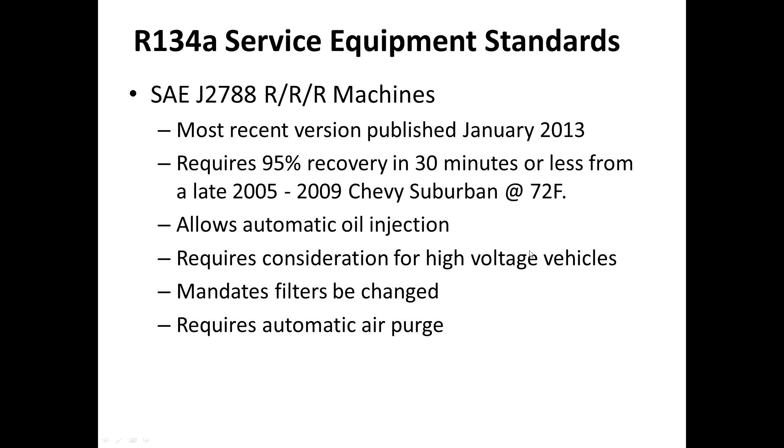Originally, there were some patents involved in that, where certain companies had patents on the process of automatically purging air. As we did 2788, those patents had to be released, what's called a FRAND, fair and reasonable agreement reached to be able to use the patents owned by someone else for the greater good. And so we now have automatic air purge as a requirement in 2788 machines.

So this is a list of SAE J2788 approved machines. And I think the important thing to note, and I think you'll see this at the very end, is this comes from a website called macdb.sae.org. The MAC database was created as part of another SAE standard, J2911, as a place where manufacturers of equipment who have gone to an approved testing lab that meets all the requirements that a testing lab should have, and have had their product tested and have had their product pass the test, they can then send their data to SAE along with a small check, and your product information will be listed on the SAE website.

And you might think, well, why would that be important to me? Well, it's important to you because if you see a machine that's listed as 2788 approved and it's not on this website, then that means that that company may have gone to a lab that's not certified. It may have just decided to put a label on it and never tested it.

Inevitably, it'll probably be a lower price machine, and you'll find even at places like SEMA and AAPEX, there are a ton of vendors, particularly from the Far East, that are offering machines for sale that do not meet the new standards, 2788 or 2843 or any other SAE standard. Yet they may advertise them like that.

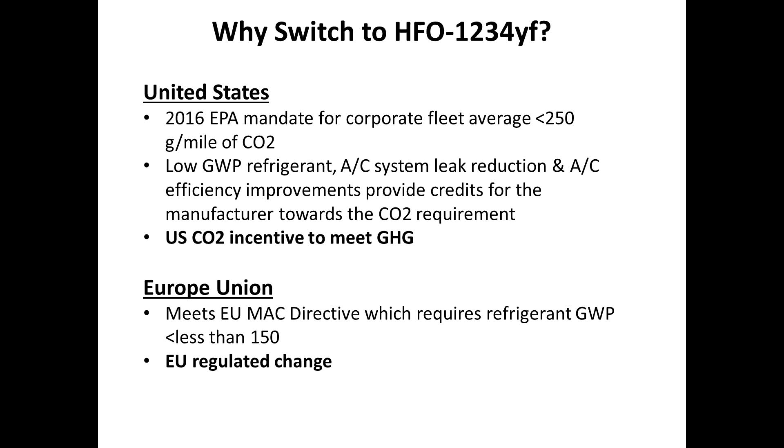So, of course, the U.S. realized it's a global market economy and decided this is the direction they were going to go and implement the same rule. So 134A at 1,300, 1234yf less than 1. Another consideration was 152A. 152A is commonly used in keyboard duster. The problem is it's pretty flammable. And there needed to be some real considerations on what to do with vehicles in order to mitigate that problem.

One of the suggestions from one of the engineers in one of our meetings was, well, we're just going to put some solenoids and some vents into the wheel wells so that if you had a front-end collision, you could vent the refrigerant into the wheel wells and you wouldn't have that flammability risk, until someone reminded them that in a collision like that, the guy or lady was probably hard on the brakes, and your brakes could be at 1,500 degrees Fahrenheit. You're about to spray a flammable liquid right onto these 1,500 degree Fahrenheit brakes, so that idea wasn't well accepted.

We also have an option of R-744, or carbon dioxide, that's similar or identical to what carbonates our beer today. That may show up in some vehicles. You may have read some articles that said the Germans are going CO2. Well, I can tell you the Germans would like to go CO2. CO2 has some good sides. It's considered environmentally friendly. Some bad sides.

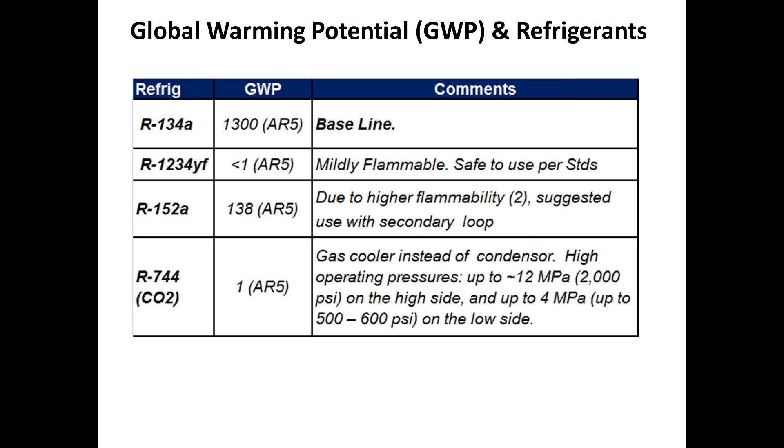I'm back. CO2 has a secondary problem where it's very high pressure, and that high pressure causes some service issues. And it also is not very efficient. So you need a lot of CO2 or a big system in order to cool. So they're going to try to put it in some bigger vehicles, some buses. Audi A8, I think they're looking at putting it in. Volkswagen Phaeton, big vehicles that can afford the weight, that can afford the size, and try to use that for their cooling. But we'll have to take a wait and see approach and see if they come up with some new technology to make that more efficient.

So we've already talked about this a little bit, but why was YF chosen? Well, among them was it's very similar to 134A. Performance is very similar. The operating characteristics are very similar. Its safety is very similar. Its low global warming potential. Its short atmospheric lifetime. The properties of YF are almost identical, which means servicing of a YF system is virtually identical to a 134A system.

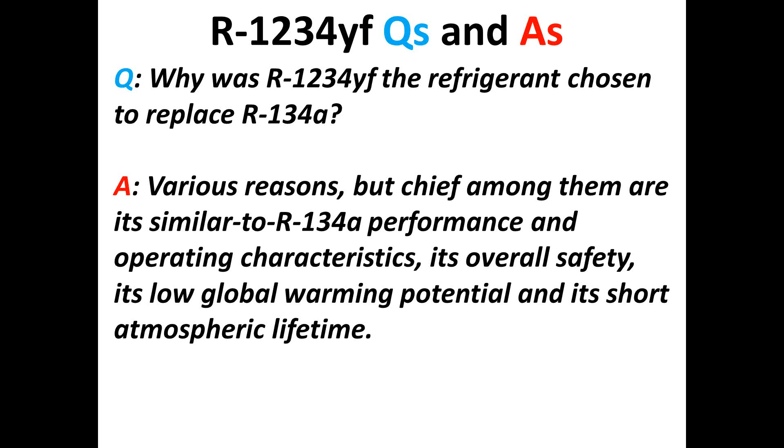If you take a look at the vapor pressure, 134A mirrors that of 1234yf. It's almost identical. It's off 3 degrees at 70 degrees Fahrenheit. I think it's about 71 psi, and 134A is going to be 74 psi. So they're almost on top of each other. The thermal stability under extreme use conditions in MAC systems is very, very good. It doesn't break down. It has a high capacity. And there were only minor design changes that were needed.

The one drawback is it's mildly flammable. And we'll talk a little bit about what mildly flammable means, but it's mildly flammable. And that's really in order to get that global warming potential down to less than 1. You have to have a fluid that disintegrates in the atmosphere very quickly, has a very short atmospheric lifetime, and 1234yf does just that.

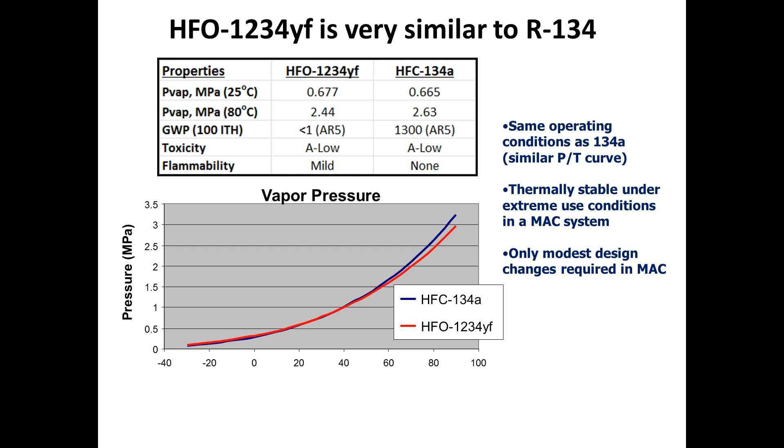So how flammable is it? Well, it's among the lowest flammable products under the hood, frankly about the lowest flammable product under the hood. If we take a look at this chart, you'll see that you have gasoline, diesel fuel, engine oil, transmission fluid, power steering fluid, and then 1234yf. And we could add in there, between power steering and YF, antifreeze, you could add windshield washer fluid. Those are all more flammable than 1234yf.

So there were some stories out there, some talk about Daimler and their rejection of 1234yf on the principle of flammability. And when you actually take a close look, their test was a simulation. The simulation was unrealistic, and if they had run that same simulation and instead of spraying 1234yf on the turbo exhaust, they'd sprayed gasoline on there using the exact same setup, redirecting from the fuel rail instead of from a refrigerant line, there would have been mass panic that all the vehicles we're driving around in could catch on fire, because, you know, look what can happen when you put gasoline on something that's 700 degrees C of temperature.

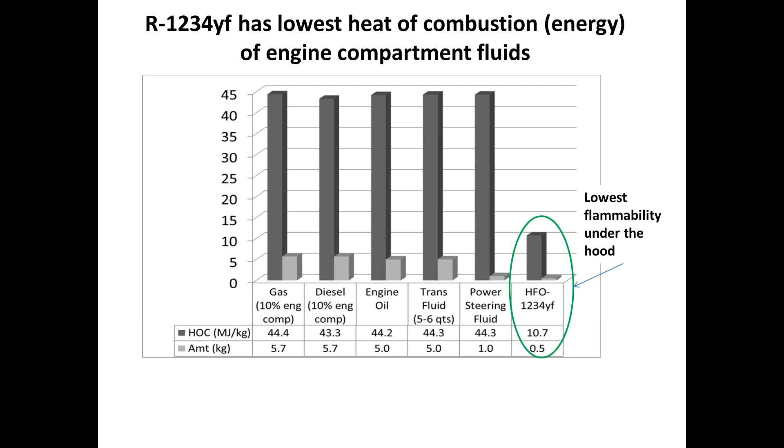So should you be concerned about this? Well, as always, everything that service technicians deal with in the shop, you have to be cognizant of toxicity, flammability, other dangers that are associated with them, things like wearing glasses, wearing gloves. But it's very, very hard to ignite 1234yf. And if you did ignite it, the flame path is very, very short, and it does not burn very hot. So it's very unlikely that it's ever going to catch on fire in the work that you're doing.

And there are things that you deal with. Every time you fill a car with oil, you're dealing with a more flammable substance than 1234yf. The difference is it's under pressure. Of course, pressure makes it more hazardous, but no more hazardous than 134A from that perspective.

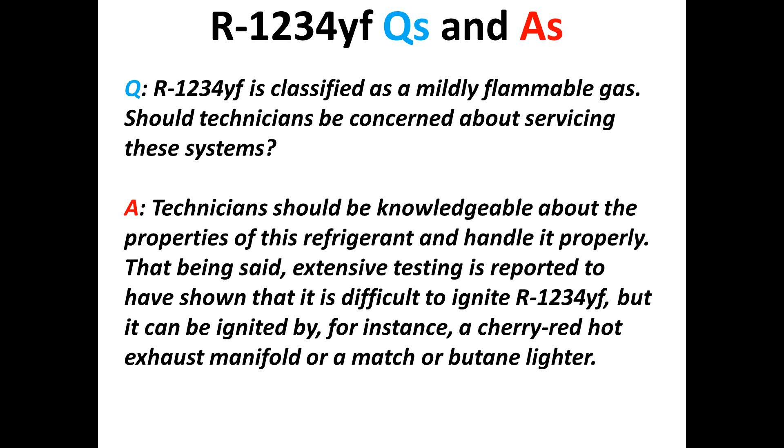There are a couple of minor differences in systems between 1234yf and 134A. The evaporators in a 1234yf system have to meet SAE J2842, and we also have some differences in the service ports. SAE J2842 was created as an evaporator standard because they wanted to make sure that we had a slightly beefier evaporator, because we wanted to reduce the risk of having a leak into the passenger compartment of a mildly flammable fluid. So we created that.

We'll find 2842 evaporators in some 134A vehicles, very, very recent 134A vehicles, as they begin to think about making them into 1234yf cars at some point in the not too distant future. But older vehicles won't have an evaporator that meets 2842. Service ports are different, but almost the same. They look like 134A ports, they're just a slightly different size.

And typical YF systems will contain something we mentioned earlier, an internal heat exchanger, or an IHX. No moving parts. It's part of the low side plumbing assembly in the system, and it improves cooling efficiency. It helps change the state of the refrigerant from liquid to vapor, or from vapor to liquid, to give the refrigerant kind of a kickstart in being able to absorb more heat.

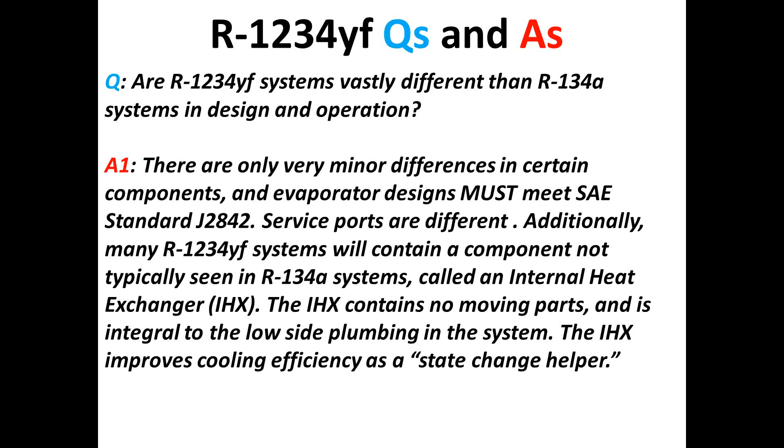This is what an IHX looks like. You've got low temperature, low pressure gas that goes into the inside, and then you have high temperature liquid refrigerant on the outside, and it goes in as one, comes out as the other, and it's really just a dual path, just two paths. And you're going to find that located in the low side line of the system. Looks like a small bulge. If you haven't seen one, it's just kind of like a small bulge, almost like not

a TXV, Dave, help me. Whatever that other thing is that I can't remember.

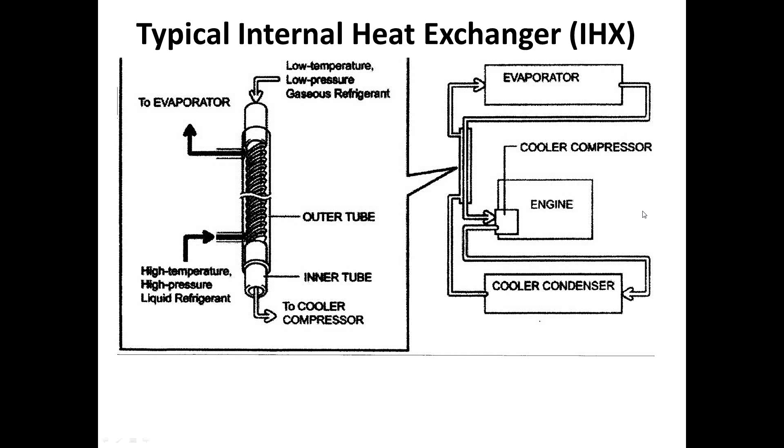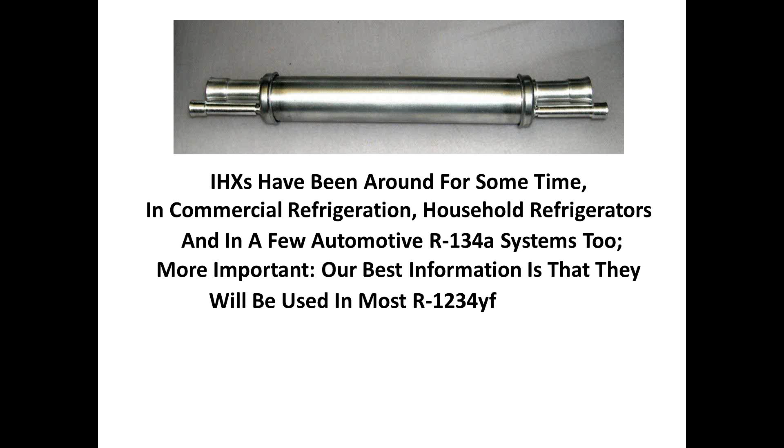So it's located in that line, and it's a non-moving device, non-mechanical, shouldn't ever cause any problems. This is what one looks like. Again, you see two paths, one that goes inside, one that goes outside. They've been using them in commercial refrigeration for quite a while, household refrigerators, and they will be in almost all of the 1234yf systems. And the word I was looking for was orifice tube. Looks like kind of the bulge you'd have from an orifice tube.

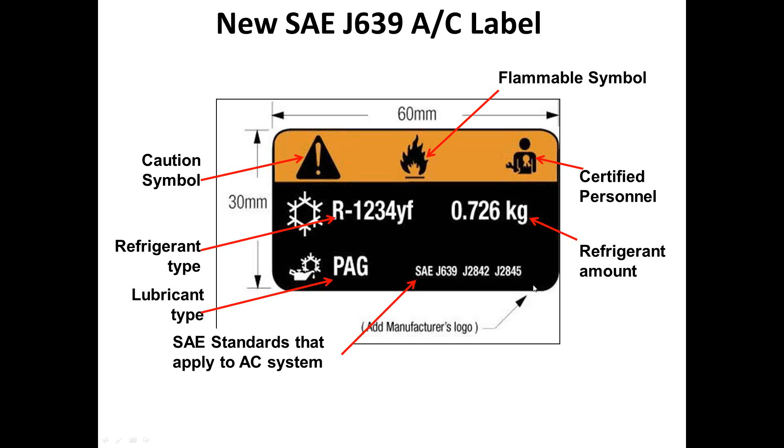Among the other differences you'll notice is under the hood of the car, you're going to have a label. That label is the new J639 label, also references 2842, indicating that it has a 2842 compliant evaporator, and 2845, which is that standard that we used to create the new 609 certification testing. Caution symbol, a flammable symbol, a certified personnel symbol, the amount of refrigerant, little snowflake indicating that you can get burned because it can get really cold, 1234yf, type of oil, and potentially a logo for a manufacturer. Not all manufacturers will use this, but the flammable symbol is really the new thing that's there.

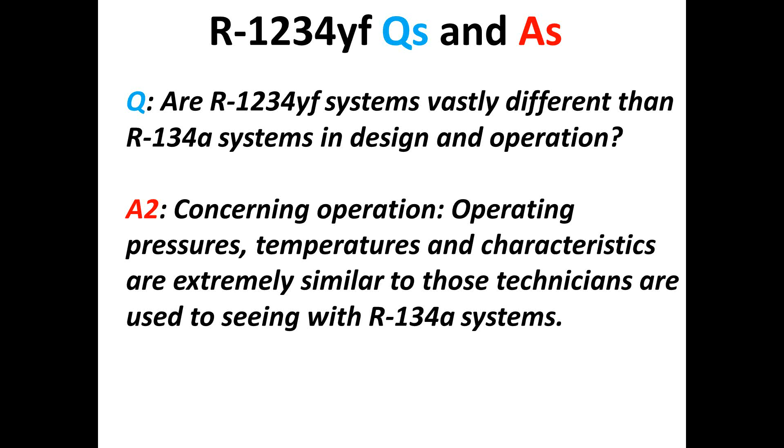How about operation? In operation, 1234yf systems are almost identical to 134A. Again, the pressures, temperatures, characteristics are extremely similar to those that you're used to seeing with a 134A system. So if you know how to diagnose a problem with a 134A system, diagnosing a problem with a 1234yf system will be cake. It's almost the same. Yep, you might have an internal heat exchanger now. But other than that, you're not dealing with secondary loop systems. You're dealing with a direct expansion system that works in a very, very similar way to a 134A.

Again, here's the PT curves with 134A and 1234yf, and you can see they are virtually identical. Again, 3 degree difference, 3 degree Fahrenheit, 3 PSI difference at 70 degrees Fahrenheit.

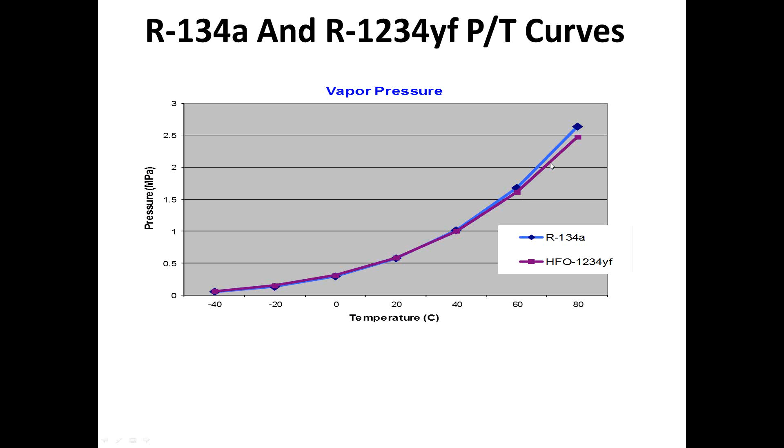Will you need different service techniques and procedures, or will those service and repair procedures be the same as working on a 134 or R-12? Well, we just mentioned that the procedures are going to be the same, almost identical. No steep learning curve at all for technicians that are already qualified. One big difference is if you got your 609 card or certificate way back when, in 1997, and you go take that 609 test now, you better study, because we know you've been working on cars for a long time, but the test is a lot different. Back in the old test, I could take a 10-year-old, give them a credit card and an open book, and they should be able to pass the test. Well, that's not the case now. You need to know a little bit more than you did before, and in reality, that's a good thing.

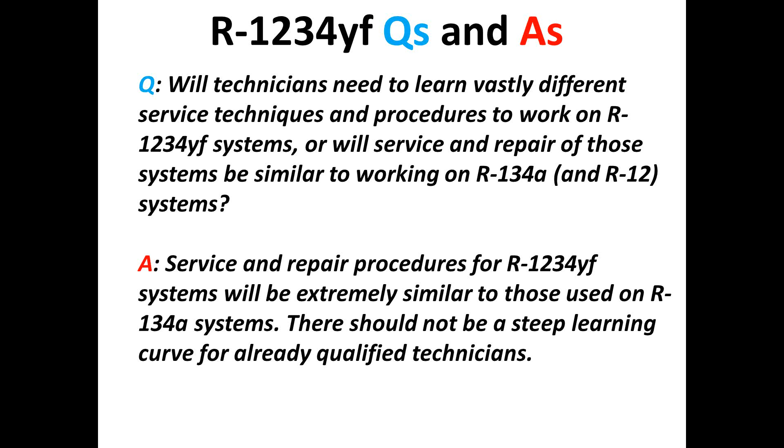How about certification? Well, right now, there is no certification required to purchase 1234yf. Pretty disappointing from our perspective. We didn't think that was a good idea, but their reasoning for this is, look, we're the EPA, the Environmental Protection Agency. If you say that 1234yf is as good for the environment as you claim it is, then why should we restrict the sale? We didn't restrict the sale of 134A. We're not going to restrict the sale of 1234yf. So eventually, you may expect to see small 1-pound cans of 1234yf on the store shelves, just like 134A.

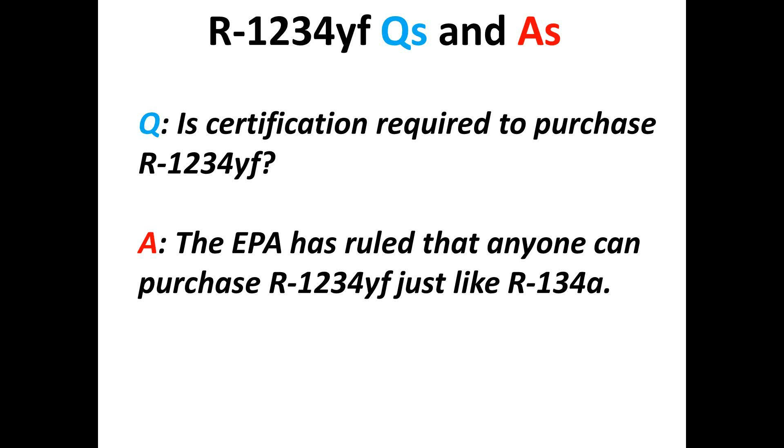Currently, if you service vehicles for compensation, you have to be certified to 609. Currently, there is no new certification for 1234yf or recertification. However, there is a proposal that's been made that says, yes, people should have to recertify because there's been a lot of changes. You recertify to the new 609, which would talk about YF and talk about CO2. There are enough differences that have taken place since 1992 when that first Section 609 came out that it may be a really good idea for older technicians, who we know have been working on cars for a long time, to recertify. So there is a proposal there. Currently, everyone is grandfathered. We'll see if that changes or not. Maybe way down the road if it does.

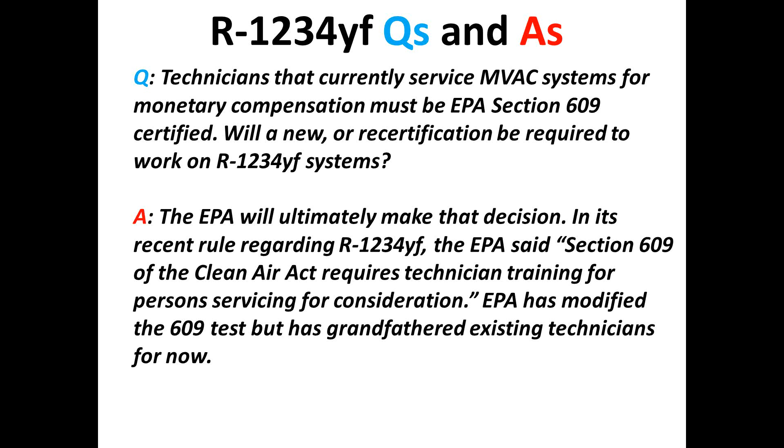But currently, you're getting about as much information today in this webinar compared to what you would see in the new 609 test that you guys should be able to pass the test just from coming to the webinar today. Can't guarantee that. Probably have to go to another one. But there's enough differences, and you're seeing a lot of them now.

So what do we need to do to work with 1234yf? Well, of course, we have new service equipment, new service labels on the cars. We showed you that. 2842 evaporators, new fittings. We talked about that. Recycling machines, cylinders, new oils and dyes, new packaging of refrigerant, and, of course, new ASE technician training 609 class.

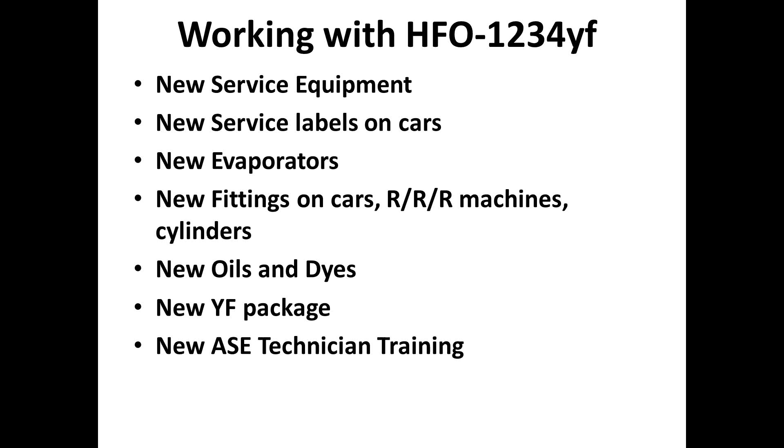The minimum equipment required to properly service 1234yf vehicles includes a recovery recycling machine certified to the appropriate SAE J2843 standard. And we say that because that standard has evolved a little bit, and there's a couple of different versions now. But an SAE J2843 approved machine is needed.

It now mandates that you must test the refrigerant before you recover it. The machine will automatically ask you to connect a refrigerant analyzer to a USB port on the machine, or will use an internal refrigerant analyzer to test the refrigerant before it will be allowed to recover the refrigerant. It locks you out.

It also requires the use of a 2913 leak detector. 2913 is the standard for leak detectors approved for use with 1234yf. Very similar to 2791 leak detectors, the 3 different leak rates; they really just took the standard, substituted 1234yf for 134A, and they went and tested them, made some software changes, and created 2913 leak detectors.

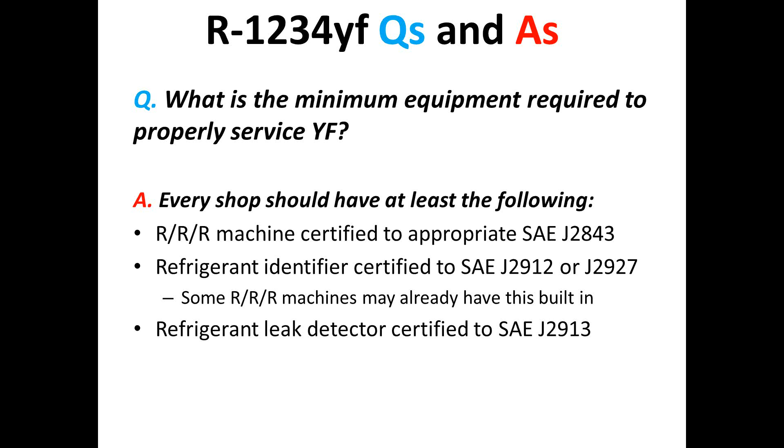One of the parts of the process of servicing the vehicle is the machine will ask you to place a certified leak detector on the passenger floor of the vehicle, and check to make sure that under a pressure test the vehicle is not leaking refrigerant and that the leak detector is not alarming. So that's why they consider that 2913 leak detector to be a required tool.

There's a new standard, SAE J3030, which was just approved in July of this year, and 3030 is a dual machine. It's a machine that meets both SAE J2843 for servicing 1234yf vehicles, as well as SAE J2788 for servicing 134A vehicles. Those machines, both the 2843 and the 3030, may have an integrated refrigerant analyzer, or they can use an external analyzer through a USB port.

They must meet the requirements for a mildly flammable refrigerant, or what's called an A2L refrigerant, including things like non-arcing, non-sparking switches, cabinet ventilation, where there's a fan inside there that's circulating the air. A certain number of air exchanges per hour are required because they want to make sure there's no buildup of refrigerant inside that cabinet. There's a two-step process now for checking for leaks, and this has been a bit of contention for some machine manufacturers.

The first part is a vacuum decay test, where they pull a vacuum, and this, of course, is after you've recovered the refrigerant. If it identifies that there's a leak that is too large, that it can't pass the vacuum decay test, the machine stops. The problem with that, in the case of some machines, is if the machine stops, it never lets you get to the pressure check. And if you can't get to the pressure check, you can't get refrigerant back in the system. And if I can't get refrigerant back into the system, I can't use an electronic leak detector to find the leak.

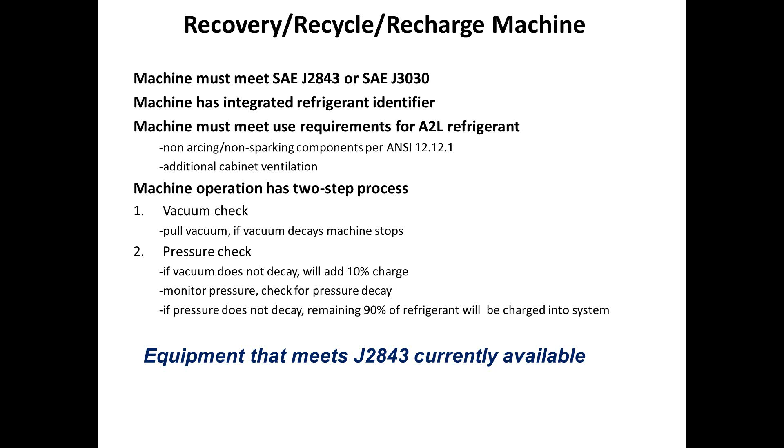There is a slight pressure change. If you were to mix 1234yf with 134A, you would get about an 8 psi increase on the high side from a pressure standpoint. It does affect the pressure-temperature relationship from a servicing standpoint, but it does not pose a risk to the system.

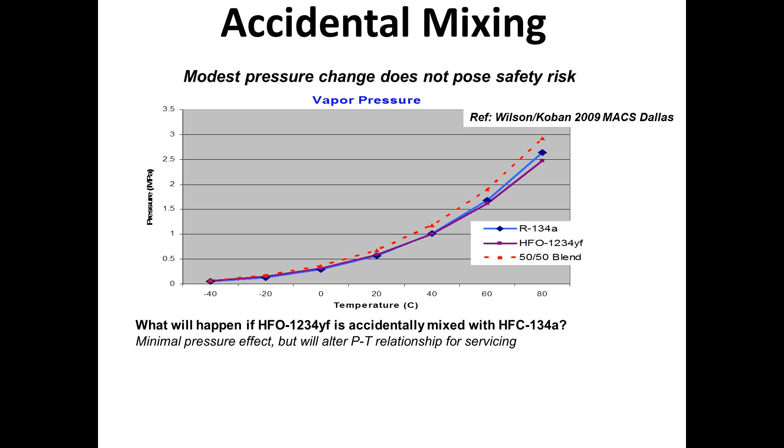With other refrigerants, if you mixed 12 and 134A, you created an azeotrope, and an azeotrope had a significantly increased pressure, and that could cause some hazard to the technician and/or the equipment they were working on. But you don't quite face that with 134A accidentally mixing with 1234yf.

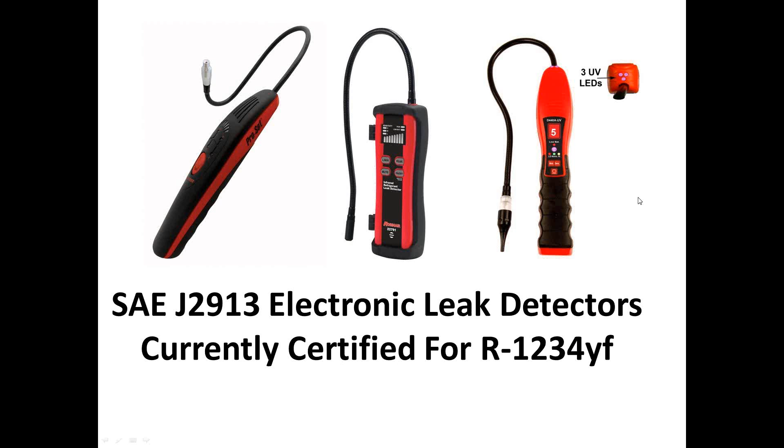So what's it all cost? That's what everybody wants to know. Well, prices will be a little higher than those of 134A tools. You can be assured of that. Early adopters pay early adopter prices. So if you want to be the first guy on the block with that brand new computer that just came out yesterday, you're likely to pay full price for it.

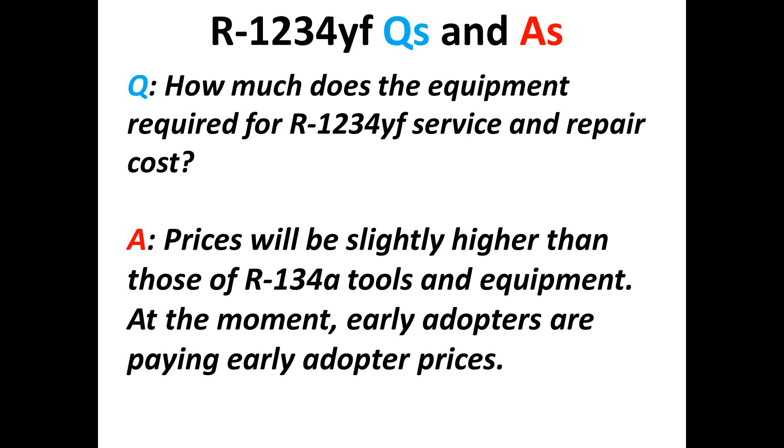As more machines have come out, prices have started to come down. And we expect that to continue. We do not expect them to fall below the current prices for 134A machines, but we expect them to get relatively close. And that goes for leak detectors, refrigerant analyzers, AC service machines, and all those tools.

So again, we'll back up to the evaporators. They must meet 2842. If you need to replace an evaporator, you cannot use a rebuilt or a 134A evaporator. So even if you're working on a car where the only change was they put new refrigerant in this version compared to last year's version, you can't use last year's version evaporator in this year's version car because it likely won't meet 2842. It must meet 2842.

One of the main reasons we won't see reverse retrofits is that you're not going to use 134A in a 1234yf car. So what's that mean concerning 134A? It means 134A is going to be available for a long time to service 134A cars. If you're not aware, while there's not a whole lot of R12 cars left on the road, there is plenty of R12 available. It's readily available.

If you have a 609 certification, there's a whole bunch of places, particularly reclaimers, that are happy to sell you a 30-pound cylinder of R12 if you want to use that on a classic car project or something that would just be better with R12. And that's been gone for over 20 years now. So we can expect that 20 years from now, you'll still be able to buy 134A to service 134A cars.

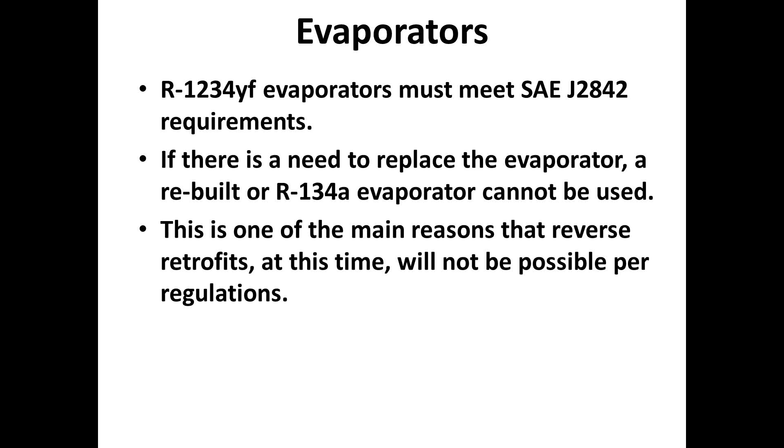One of the questions that often comes up is about dyes and oils. Well, oils for 1234yf cars are different than the oils for 134A cars. Not significantly different, but they have a different additive package. Dyes also are usually propelled by oils. Essentially, a dye is nothing more than the coloring of oil, and then you put that oil dye into a system, and it gives you that fluorescent effect throughout the system.

So universal dyes and oils are not a great thing to look at right at the moment because we don't have enough experience with universal dyes to know that the compatibility with 1234yf systems is going to be good in a couple of years. There are some specific dyes and specific oils that have been released for 1234yf, and we recommend that you stick with things that are designed for YF and not a universal product.

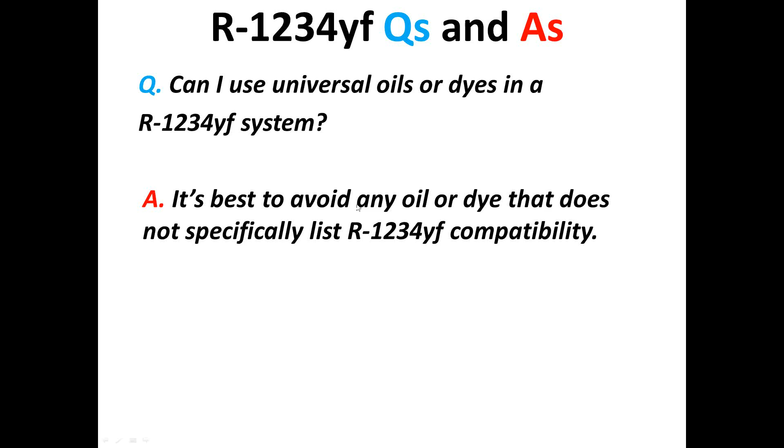In general, YF can be used with the same type of oil as 134A, meaning a PAG or a POE, and the same type of dyes, but not the same dye. The additives in the oils or dyes that are designed to work with 134A are not always well suited for 1234yf. In particular, they found that the additive package that was put into 134A PAG oil was not completely compatible with 1234yf as a refrigerant, and that oil might start to prematurely break down if you were to use that.

So you want to stick with an ND12 oil for 1234yf if it's a PAG, or an ND11 if it's a POE, as opposed to an ND8 for 134A. A lot of the manufacturers are trying now to go to a single oil, meaning they're not going to have a 46, a 100, and 150 weight oil. They're trying to go across their line with a single weight oil so that you don't have to stock too many different varieties. But you want to make sure you're using an ND12 or an ND11 for 1234yf systems.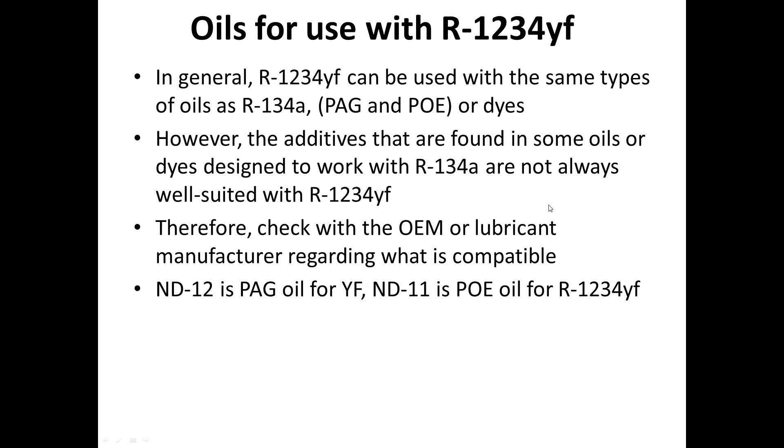The other reason is the stuff's pretty expensive. And if I'm going to leak out of a cylinder, I want to only leak out 10 pounds, not 30 pounds. And if I'm going to have one walk away into somebody's back pocket, I only want to have a 10-pounder walk away, not a 30-pounder, because the stuff is not cheap.

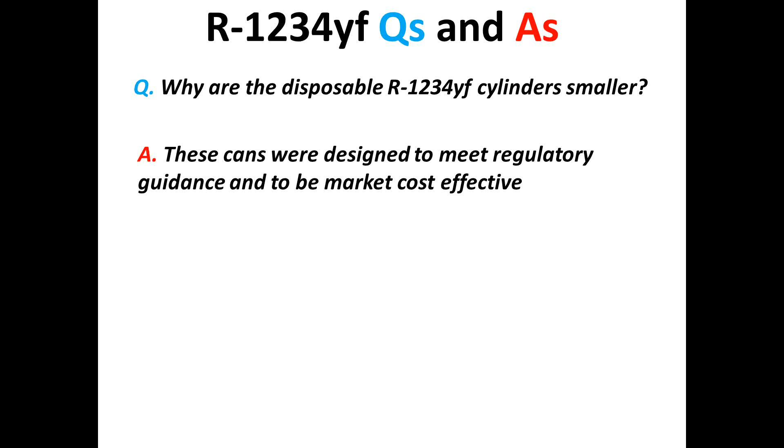This is what a cylinder would look like. It actually does look like this. This is put in there just to highlight the fact that it is a white cylinder with a red band on it at the top. It's 10 pounds, 4.5 kilograms. It has a pressure relief valve instead of a rupture disc, which is a good thing. It means if it gets too hot, pressure gets too high, it relieves pressure until the pressure goes down, as opposed to blowing out all the refrigerant.

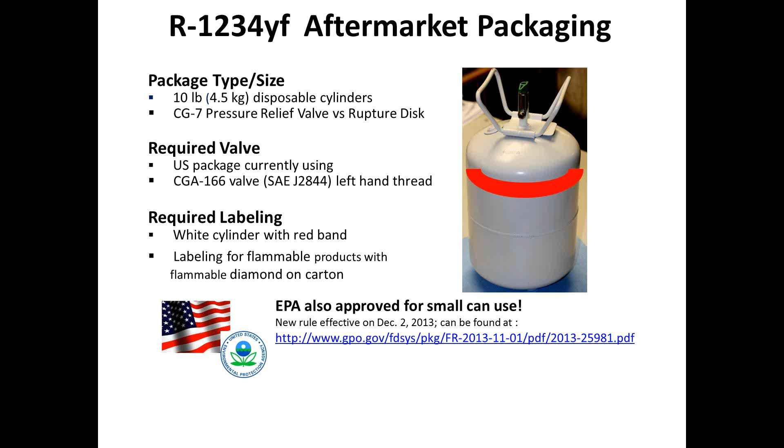Packaging uses a CGA 166 valve. Essentially, it's pretty simple. It's a left-hand Acme thread. So it's the same thread as on a 134A tank, except it's a left-hand thread instead of a right-hand thread. White cylinder with a red band, labeling for flammable product, including the diamond on the carton. And EPA has approved 1234yf for use in small cans. You'll also see the new internal pressure relief device without the rupture disc. Allows you to blow off refrigerant and then reseal.

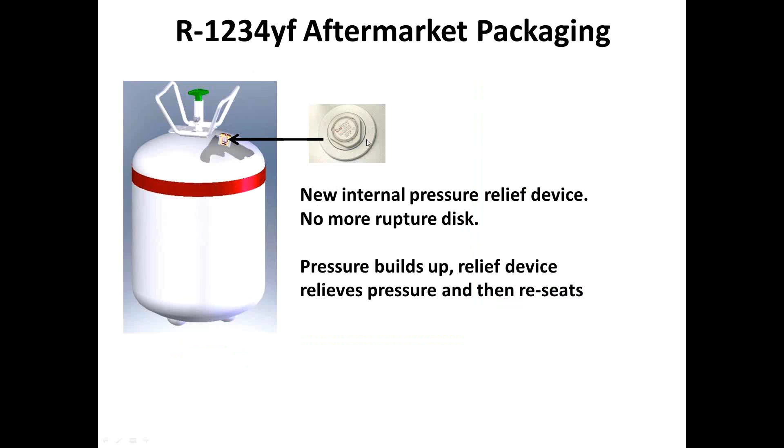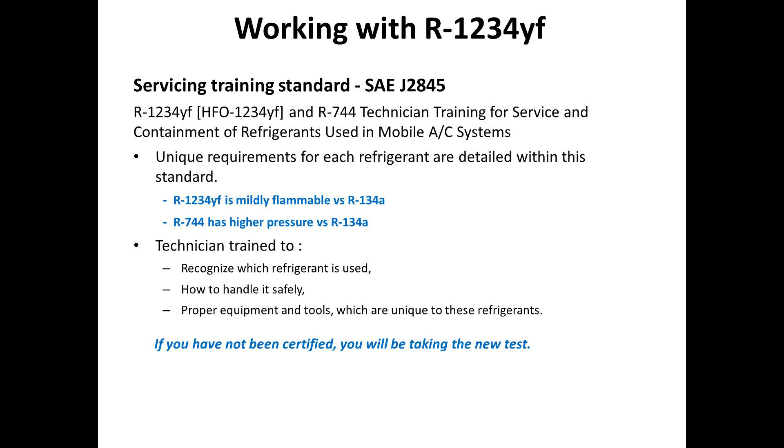Service training standards, SAE J2845, that of course is the basis for 609. Gives some additional training on 1234yf and CO2 or R-744 for containment of refrigerants used in motor vehicle systems. Talks about the unique requirements for each refrigerant, the mild flammability of YF versus 134A, or the higher pressure of CO2 versus 134A. And technicians now get trained to recognize the type of refrigerant being used, how it needs to be handled, and the proper tools and equipment that are unique to these new refrigerants and any other new refrigerant that may eventually crop up.

So from a service standpoint, you want to understand the unique differences between YF and 134A, in particular the slight flammability difference, identification of the different fittings and the labels for each refrigerant, along with what kind of tank you're working with. How to use refrigerant identifiers, you're going to need to know how to do that, whether it comes from Neutronics or from somebody else. It's mandatory on the 2843 or 3030 machines, so servicing YF systems requires that. You need to know how to use electronic leak detectors and/or fluorescent dyes. Each has a place in the industry.

Understand good servicing practice, including proper recovery, recycling, and recharge, as well as the safety and environmental aspects, vehicle recommendations from the manufacturer that are designed really to promote safety for the technician, minimize the impact to the environment, and provide guidance on the appropriate recovery, recycling, and charging equipment.

It's important to note that compared to old 134A systems, new 134A systems and subsequently 1234yf systems use significantly less refrigerant than we used to. And that means that refrigerant charge is critical. Another aspect of 2788 machines and 2843 machines is their charge accuracy and their scale accuracy for recovery to make sure you get the correct charge. Because overcharging a vehicle will make it inefficient and make that system not work well. And we need to be much more precise than we used to be as these systems have gotten smaller.

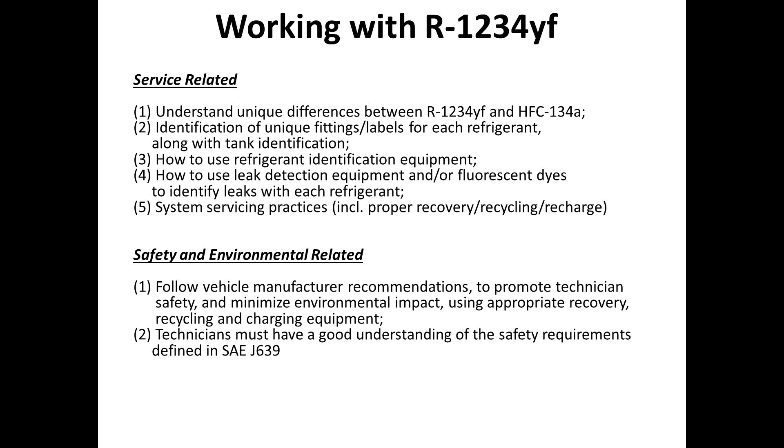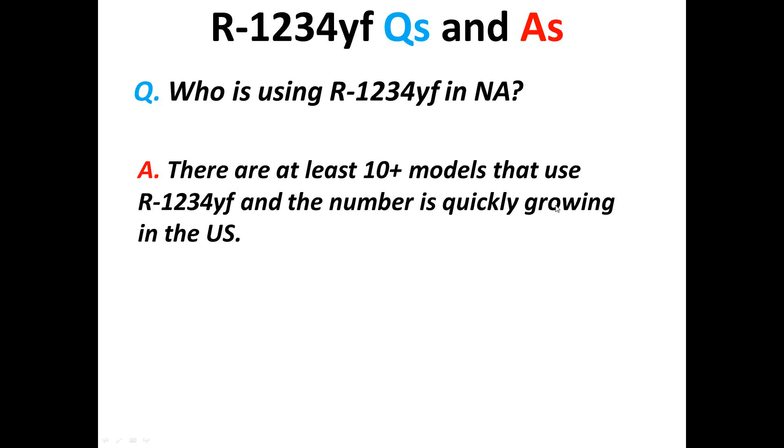So who's using 1234yf right now? Well, 1234yf is being used in over 10 models, and that number is continuing to grow.

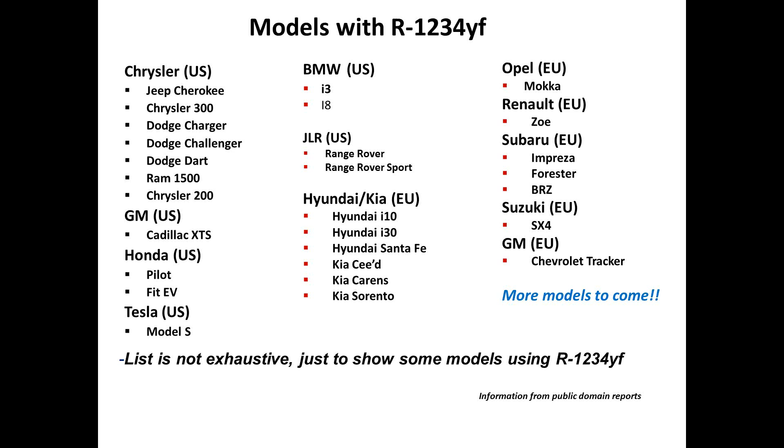Whether you see them in the near future or not will really depend on what your customer base looks like and whether you do body shop work or not, how long before the warranties are up, but it's coming, and they're all going to have it eventually. We predict 90% by 2018 of the vehicles being sold here in the U.S. will have 1234yf.

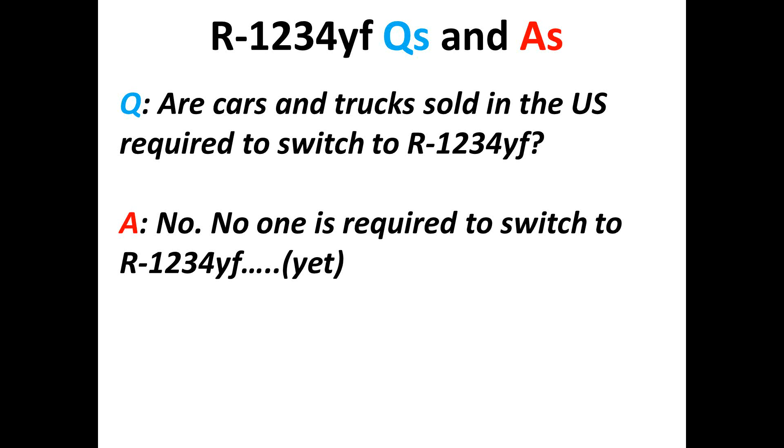So are they required to switch to YF? No, no one is required to switch to YF until 2021. And even then, you're not required to switch to YF. You're required to switch to a refrigerant that meets the EPA's requirements for global warming potential, which we believe is going to be set at 150, but it won't be 134A.

The cost will come down over time. Some of the aftermarket players, CarQuest and so forth, do offer better pricing, but the lowest price I've seen is somewhere in that vicinity of just under $1,000 for a 10-pound cylinder.

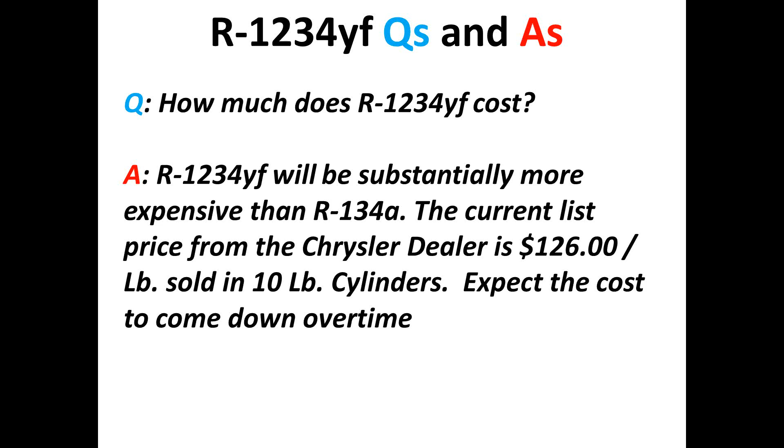So is this the end of 134A? Well, as I said, 134A is going to be around for a long time. We've got another 20-plus years of servicing 134A systems. There's no plans to get rid of 134A. We're going to continue to manufacture it for the time being. We're going to continue to use it for quite a while. We're going to service with it really till those vehicles are gone. As I said, we're still servicing R-12 vehicles.

And 2021 is the date that has been put into law now. There's an exception or two to 2025 for some special cases, but you won't see any of those. And we have do-it-yourself use of 1234yf and continuing do-it-yourself use of 134A. I'm not a huge fan of that, to be sure, but it is what it is, and that's the way they've ruled. So that's the end of the presentation.

I'm actually going to open a separate window here. And Dave, we have questions popped up there. I'm on a different machine than I was earlier. We do have some questions. And Peter, I think what I'm going to do is I'm just going to go read up from. We kept pace with some of them. Some of them were pretty standard stuff, as far as being certified in 609 and some of the other things. But we do have a couple of equipment questions and a few other things here. Okay.